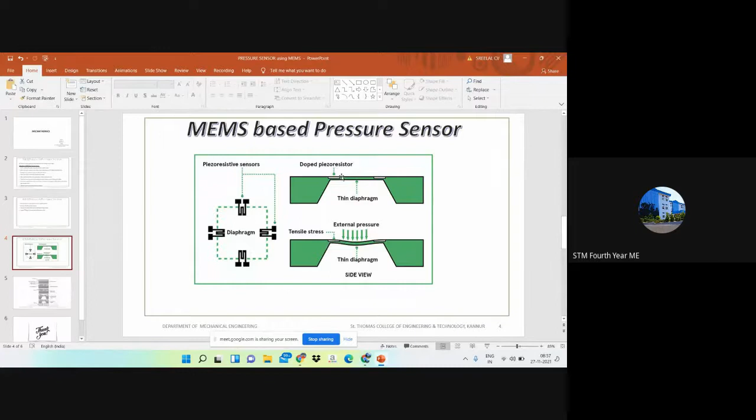Yeah, last class we discussed about this pressure. Like this is a piezo resistance sensor. Okay, that means by the help of that piezo resistor, we are converting the particular force or the pressure which is acting over a diaphragm into an analog signal.

Okay, due to the external pressure there will be a bending of the diaphragm. Due to that the piezo resistor will be having a tensile stress, or it will be stretching. Due to the stretching there will be a change in the resistance. As a result, this change in the resistance will be measured with the help of a Wheatstone bridge. This was the topic we discussed yesterday.

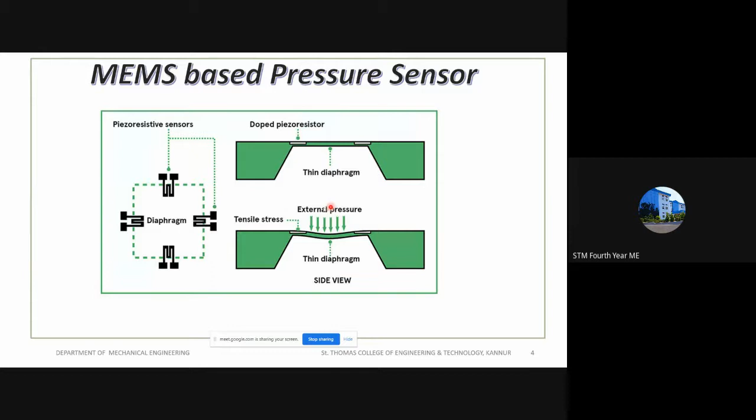So today we are going to discuss how this particular pressure sensor is fabricated using MEMS. Okay, as I told earlier, it is one of the sure questions, because the fabrication using MEMS of the pressure sensor, as well as the MEMS-based accelerometer and gyroscope, in every university exam, you can see a question over these topics. Okay.

Okay, so we are going to discuss this fabrication step by step. First of all, there must be a wafer, or we also call it a substrate. Okay, this is the substrate. After the substrate, there will be a deposition of silicon nitride. So the silicon nitride is deposited over the wafer or substrate.

Okay, so the deposited layer depends upon the substrate or the material in which we want to develop the sensor or other devices, based on that particular usage. Like last day we discussed about physical deposition. At that time we discussed about the gold and the material based on substrate and the target material, the same condition. So here we are discussing silicon as substrate and the deposition as silicon nitride.

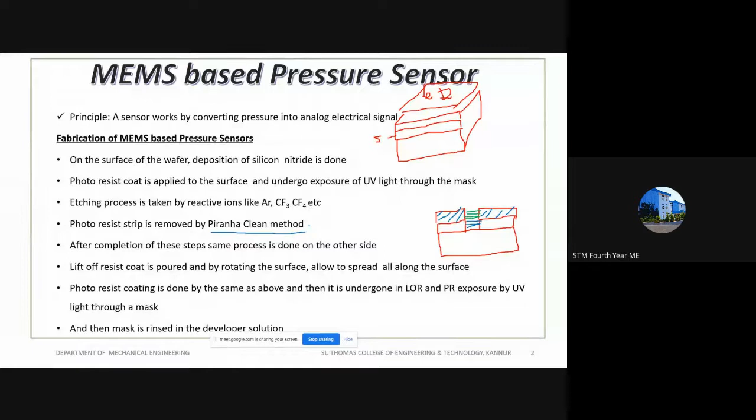So you have to note it down, because in this Piranha cleaning method we will actually be dipping this thing into the Piranha. I will show you a video, then you will get an idea about that. Just 1 minute.

So this Piranha cleaning method uses a solution of concentrated sulfuric acid, H2SO4. We already know the formula for this. With that there will be hydrogen peroxide, which is H2O2. Both will be in the 3 is to 1 ratio. So this is the Piranha solution.

So for removing the photoresist strip, we use the Piranha clean method, a solution having concentrated sulfuric acid and hydrogen peroxide in the ratio 3 is to 1.

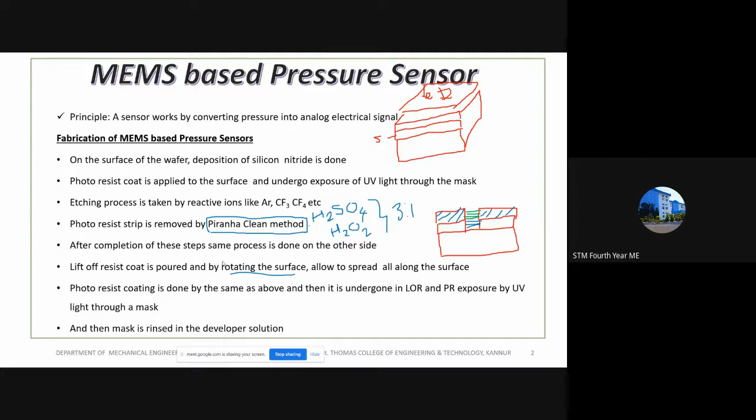Okay, so that is also removed, or it is washed out. We can say that it is washed out using a developer solution. So then what will be happening? The deposition process taken by the chrome or the gold deposition. So after the completion of the photoresist and the etching process, we will be getting a particular shape over that particular substrate.

Okay, then we will be doing it upside down. We are keeping it upside down, and we are doing this deposition process. So here we will be depositing the chrome or the gold. We already discussed this method.

From the exam point of view, they won't be asking to explain the physical vapor deposition method. Instead of that, they may be asking to explain the gold deposition process. So the same thing is there, because we have to understand that the gold is deposited by the physical deposition method. So this is that particular experiment setup.

So in that there will be a substrate, like this. At that time there will be a substrate, and a target material will be here. We already discussed it. So here the argon gas will be given, and this particular chamber will be at a low pressure.

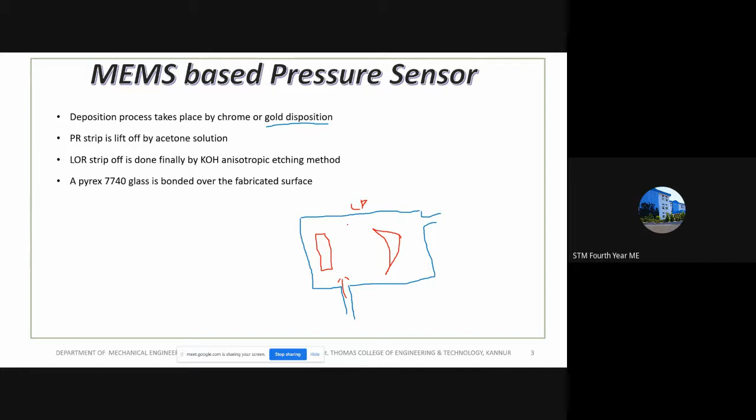So at a low pressure, we will give these argon gases energy, RF or otherwise. Then it will get dissociated into ions, and these high energetic ions will be hitting over the target material, and this will be transported over here and coated. So you have to remember this: E, T, and C.

Anyone, can you please tell me what is that? We discussed it in the last class. What was that? E? Anyone tell me? Evaporation. Yeah, evaporation, transportation, and condensation. Very good.

That means due to the bombardment of the ions, this particular target material gets evaporated, or converted into the gaseous state, and by some means it will be transferred over the substrate, and over the surface of the substrate it gets condensed.

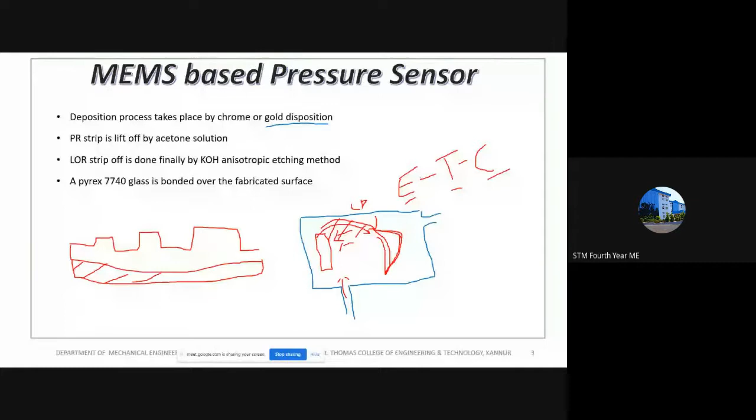While discussing the pressure sensors, there are so many pressure sensors which sense the pressure with the help of a piezoelectric or capacitance, and so many others. So this is one of the pressure sensors, which senses the pressure with the help of a piezoresistor.

Okay, so you have to understand that there are so many sensors which sense the pressure. Here we are using a piezoresistive sensor which converts the pressure, the deformation or the force acting over this particular surface, and that value will be converted to a usable analog signal by the piezo sensor here.

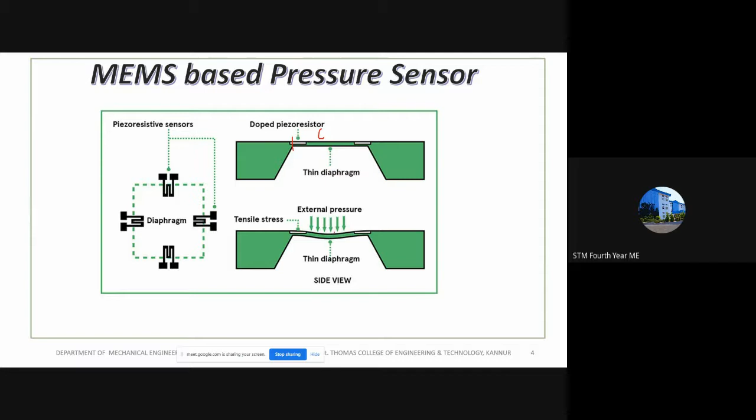Similarly, there are capacitance sensors also. And there are so many applications, so you just need to understand this also, so you don't forget to draw this particular figure. Okay, so here is that particular thing we discussed till now.

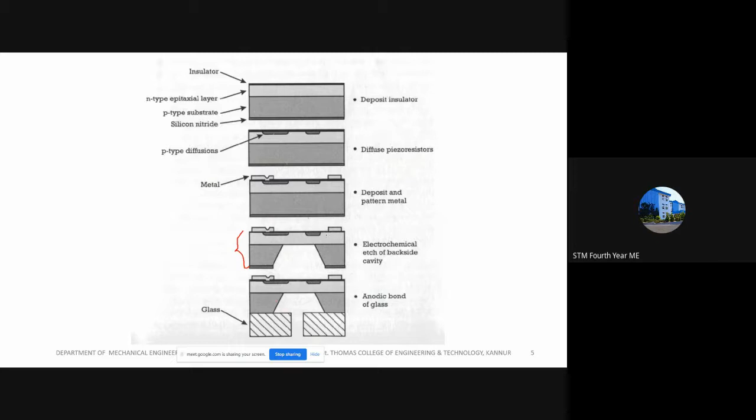Through that deposition, we will be diffusing the piezoresistors over the surface. Then we will be giving the metal deposition, and the patterning of the metal will be carried out, and the electrochemical etching of the back cavity will be carried out. After the final thing, we will be able to get this. Then we are giving an anodic bond of glass, and this glass is known as Pyrex 7740. So this is the fabrication of the pressure sensor.

So hope you understand this. Here you have to draw this figure, which will be given to you in the module on the Linways platform also. Through that you will be able to read.

So in the next class we will be discussing the accelerometer and gyroscope, and next we have to discuss the different etching methods, like wet etching and everything. We already told this, and we have to explain a process in the etching also. Then with that the module will be over.

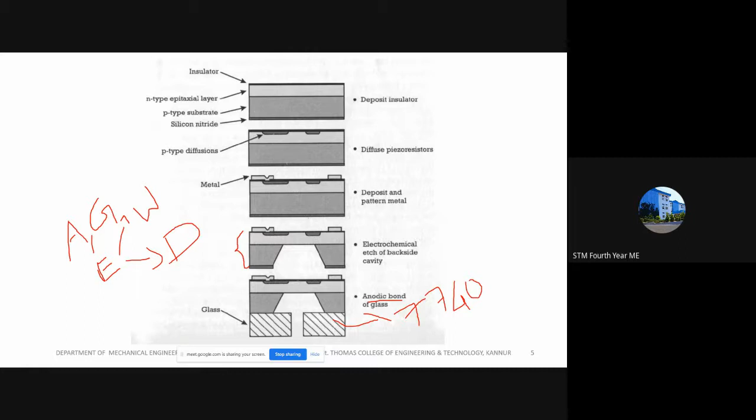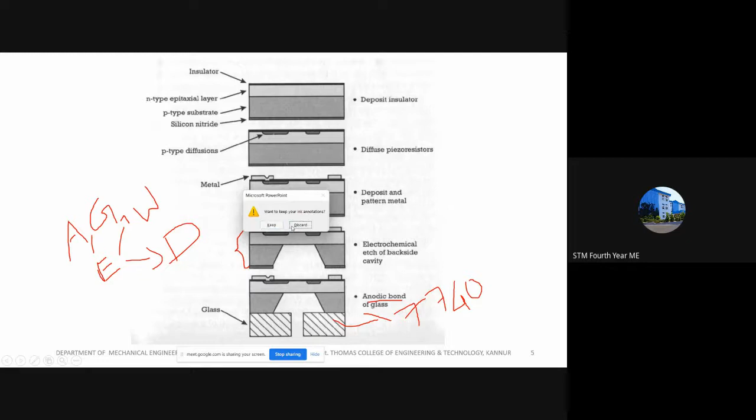Okay, fine, the class is still till 9:30. Before that I will be showing you a video. Just wait, can you see? Yes, sir. Yeah, okay, so just see this.

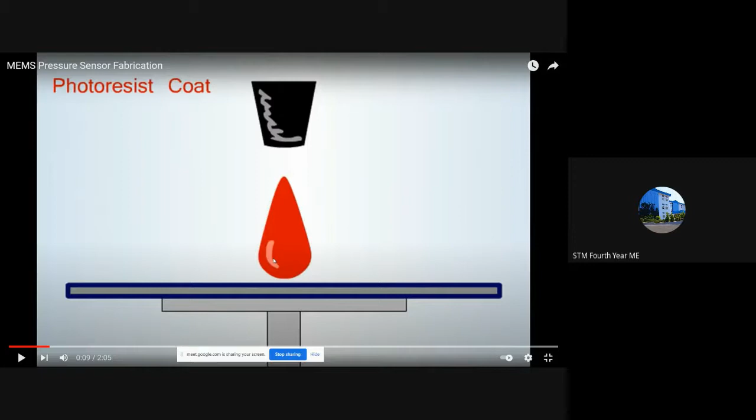So this is the vapor deposition. The first layer deposited is silicon nitride. Here is the photoresist coat. I already told about the photoresist coat, and then we will be spinning it in order to deposit this photoresist coat over the surface uniformly. You can see that.

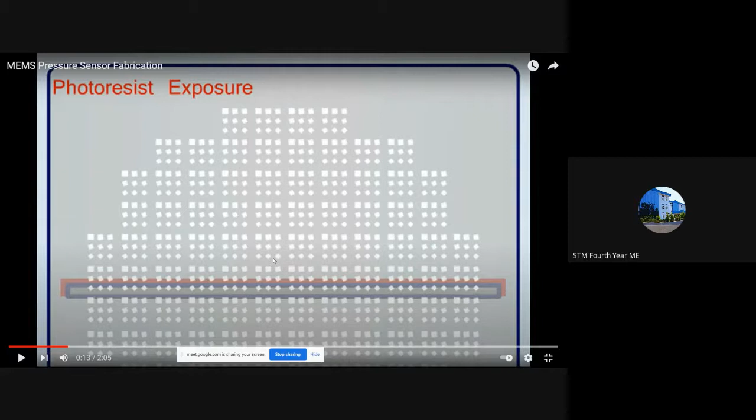Then the photoresist, then there will be a mask. So the mask came. This is the pattern; the UV rays came, so it is embedded over the photoresist. Then photoresist development is taking place. I told you that due to the UV rays falling, that particular photoresist will be soluble, so we have to remove that. For that we are using this technique.

We will be dipping this in tetramethylammonium hydroxide, TMAH, by which the soluble photoresist part where the UV rays fell will be removed. Now notice here, it is a shade, right? Not the bright red one, the little lighter red. This is the area where the UV rays fell, and this will be removed with the help of tetramethylammonium hydroxide.

So we will be getting it like this. So that is the development. Can you please tell me what will be the next step?

Hello. Okay, here the pattern is made over the photoresist. So the next one will be etching. Yeah, very good. So next here is the etching. Okay, reactive ion etching. Here, the same as we discussed, there will be so many ions. CF4, CF3 and argon and everything.

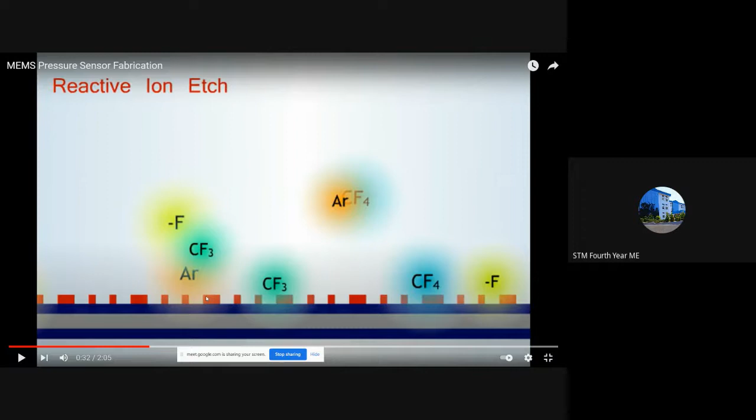We are allowed to fall on this. Okay, fall over here, then you can see that. Then as a result, the strip over that particular area is removed.

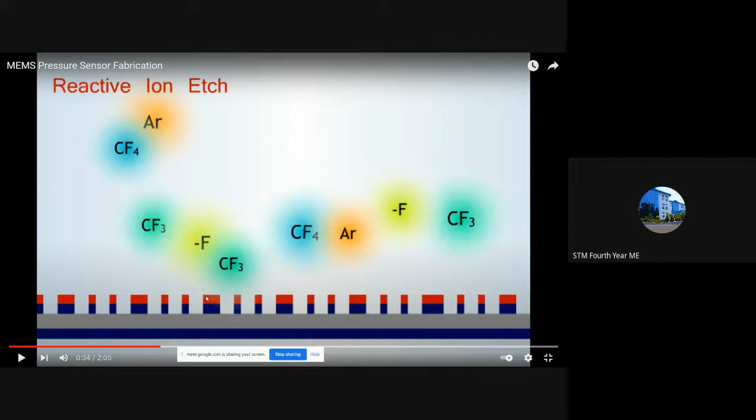Okay, so this is happening. After this, next we have to remove the photoresist strip. For that we are using the piranha clean method. Piranha cleaning is carried out by dipping this particular thing in a solution which has concentrated sulfuric acid and hydrogen peroxide.

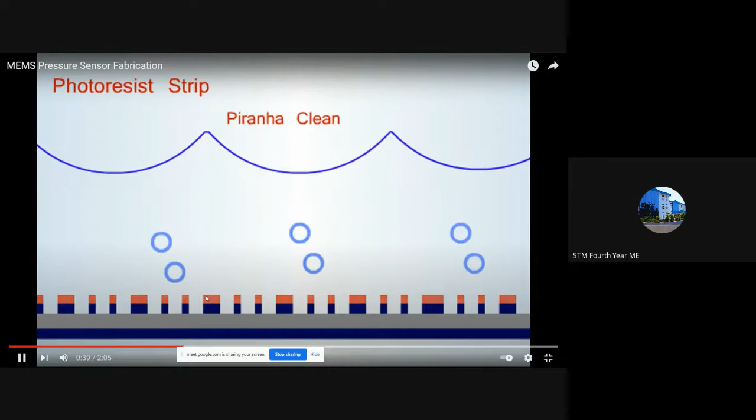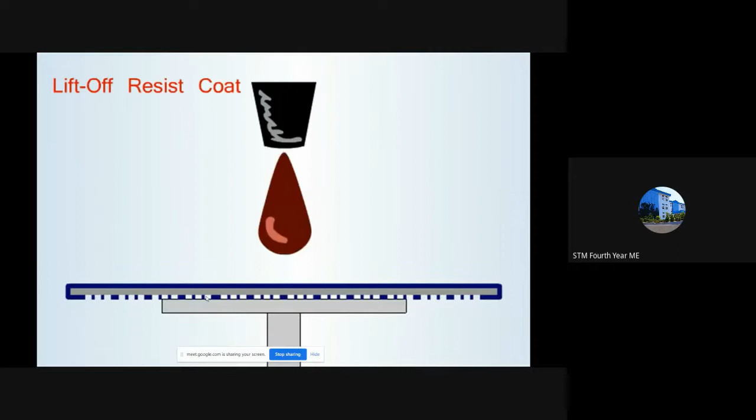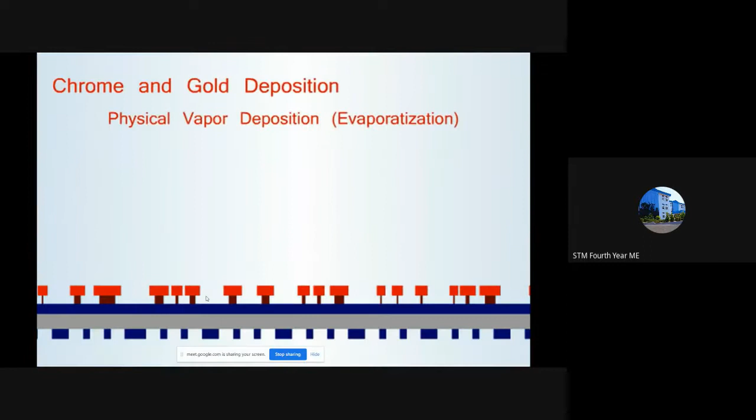Then it is used for the removal of the strip. So after this we will be making the same process on the upside down also. Photoresist coat, then UV, and here there is a small difference. Just watch. Then the developer solution. So vapor deposition. Here, look, vapor deposition. We discussed the deposition of chrome and gold.

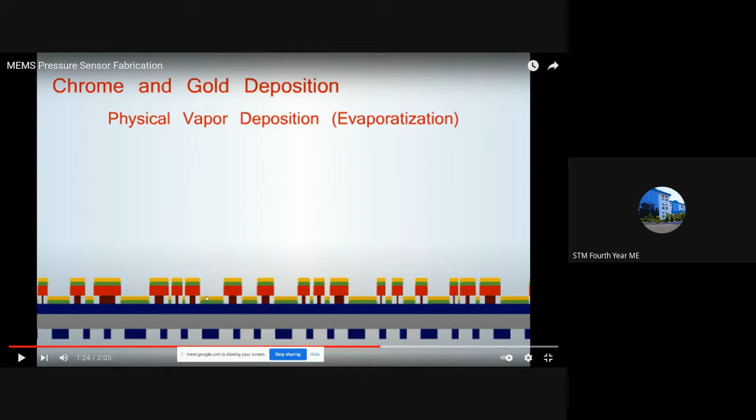So then we are using the acetone solution for the lift-off of the PR strip. Then next we have to remove the lower strip also. For that we are using potassium hydroxide, I think. Yeah, anisotropic and isotropic etching: here we have to understand that this particular etching is based on,

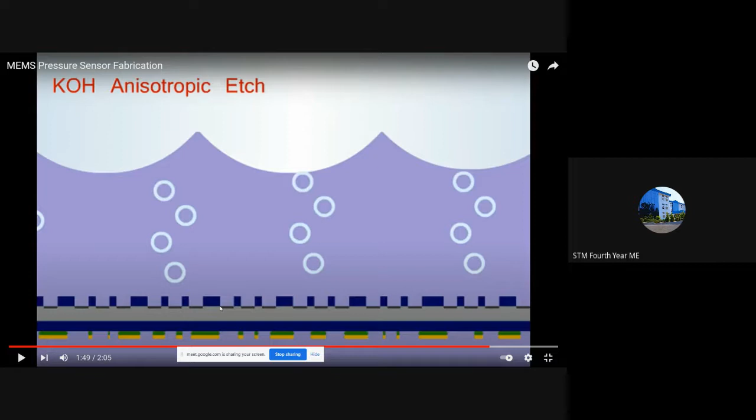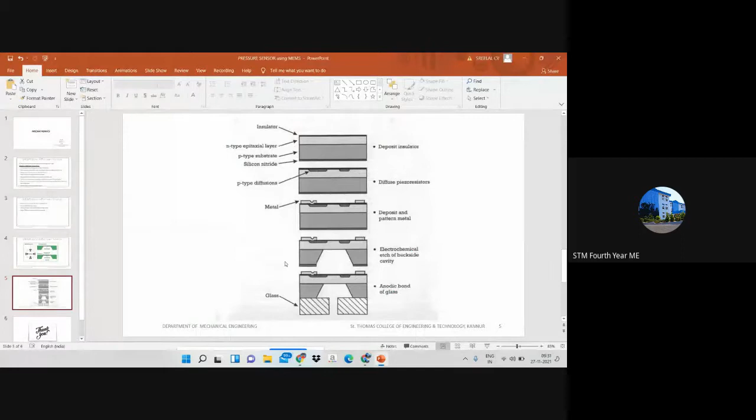Okay, we got the thing. I hope you understand. Okay, now, hello, hello. Yes, sir.